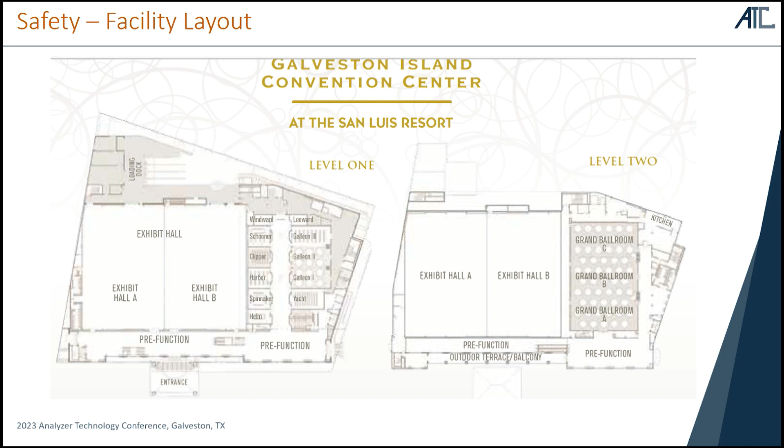A little bit about the new look, the little bit new format for the place. We've changed the dates. Thankfully, everybody got it correct. I did meet an old friend yesterday who thought it was Sunday, which is wonderful. We used to be Sunday to Thursday and drag everybody in on a Saturday or a Sunday. We decided that was not valid anymore or necessary.

So this is our format, Monday to Friday, and we will do this going forward. Monday is our technical training day. For those that were there yesterday, we had a fantastic turnout. We had about 120 students yesterday come through the halls, techs and so on, come through both of our tracks. We do a fundamentals course, which runs through the basic understandings of all analytical instrumentation in a program throughout the day. And we do an advanced course this year, focused on sample handling systems. We do a common one on that.

We've expanded our show back now to... We can't hear you. You can't hear me?

Can you hear me now, Rocky? It's my English accent—what we do is mumble, then hand you a flag, and you're in the British Empire, buddy. That's how it works. Suddenly we own you, and you didn't realize it at all. That's the rules, we've been doing it for years. We're quite good at it, apparently. How about that, Rocky? You hear me okay now?

Yeah, all right. So today, Tuesday, Wednesday, Thursday will be our event, starting today, all day tomorrow. Papers in this hall. The rest of the event will be down in the vendors hall, including everything except breakfast, which will be up here. All the drinks, all the sponsors and so on will be downstairs. Technical papers in here. The vendors hall is expanded.

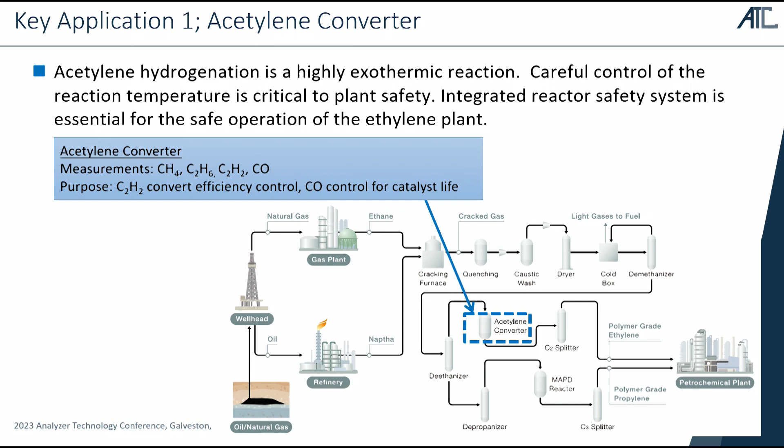Our target measurement components are methane, ethane, acetylene, and CO. This is our target specification for these four components, at the acetylene converter inlet and outlet. The outlet requires very low sensitivity, low concentration measurement, around 10 ppm or less. Our target specification for performance is 1% of full scale for linearity and repeatability, a response time of 3 seconds for Td plus T90, and a calibration interval of 1 month.

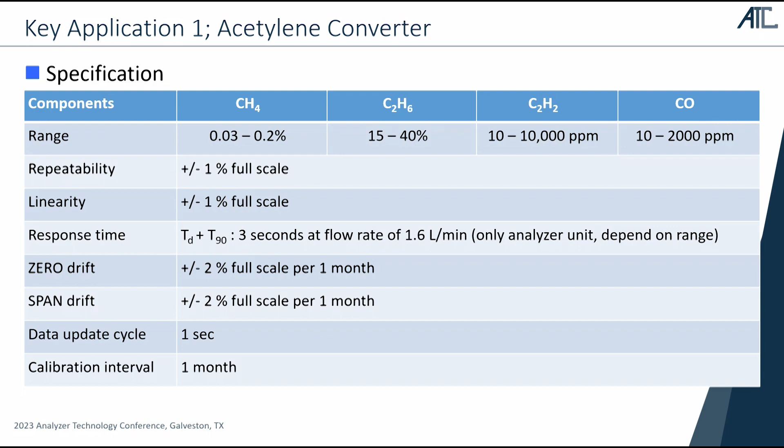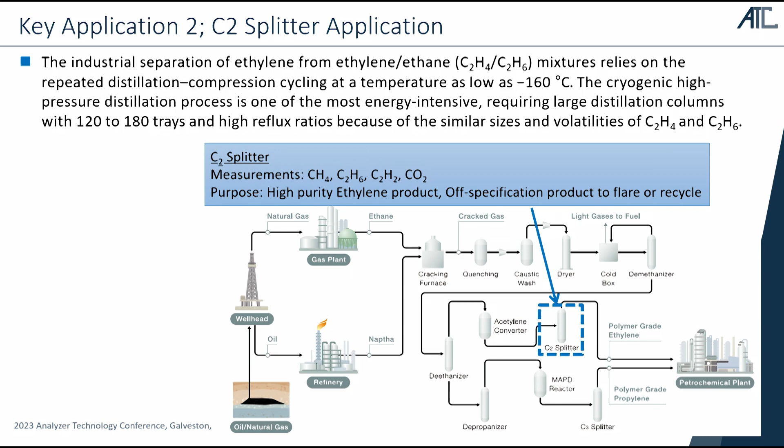And the second key application is a C2 splitter. This is also important for the ethylene plant. The separation of ethylene from ethane by distillation is normally the final step in production of ethylene, so impurity control is important here. This is also a target specification for the C2 splitter, so the performance specification is the same as the acetylene converter. That is our target.

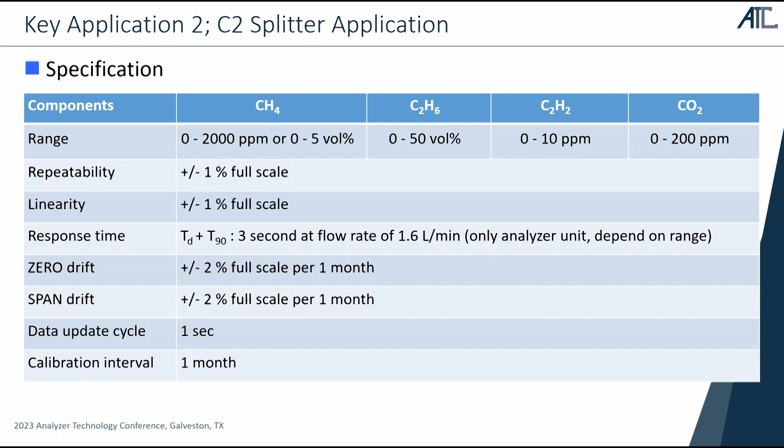This analyzer has many advantages in gas sensing: a high resolution mid-infrared laser system, 3 second analysis time, high sensitivity down to minimum 20 ppb, and it equips up to 6 lasers per application depending on customer requirements. It's robust, simple, and compact. I'll later explain the high sensitivity achieved by our unique interference correction method. That is one key component, a keyword.

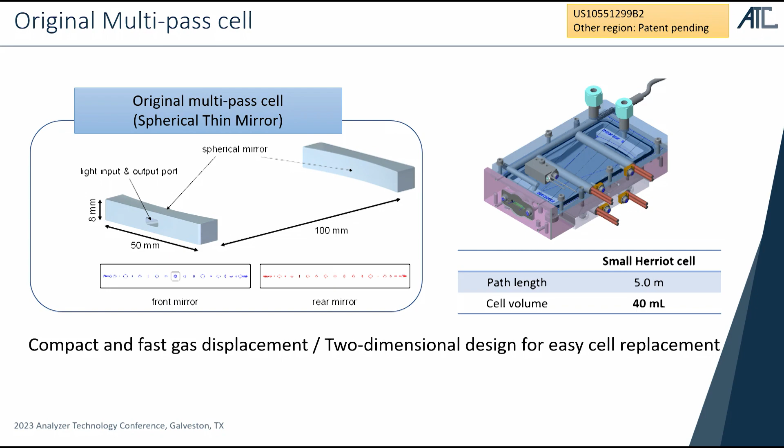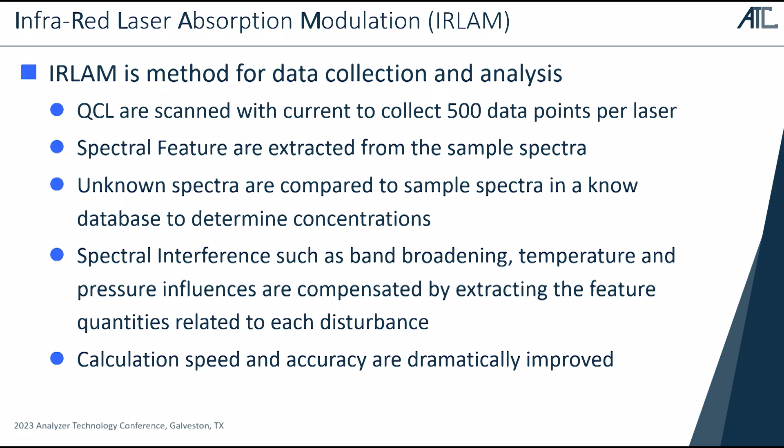From the next slide I want to explain our new technology, IRLAM, infrared laser absorption modulation. It's a new technology. IRLAM is a method for data collection and analysis. The QCL is scanned with current to collect 500 data points per laser, and spectral features are extracted from the sample spectra. Unknown spectra are compared to sample spectra in a database to determine concentration. Spectral interference, such as band broadening and temperature and pressure influence, are compensated for by extracting the feature quantity related to each disturbance. Calculation speed and accuracy are drastically improved.

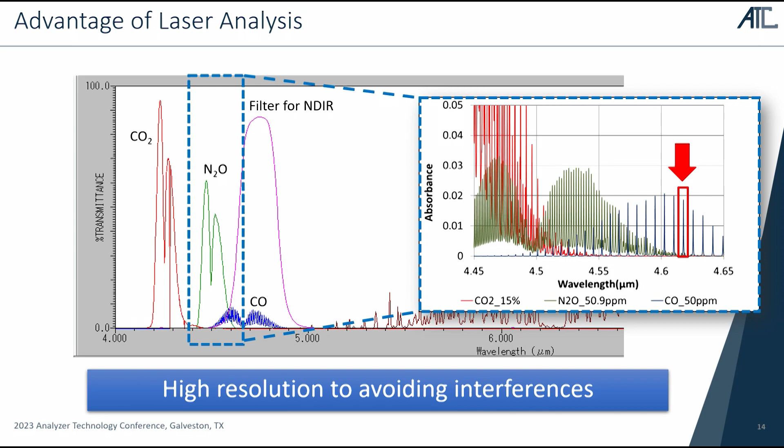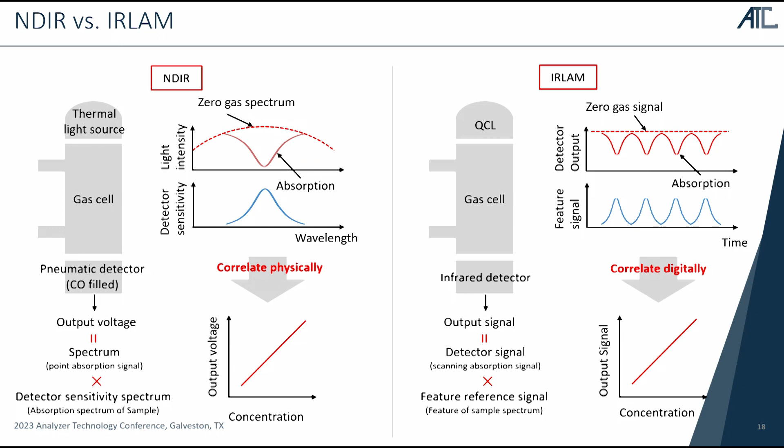This slide shows our calculation method of the feature quantity. The feature quantity can be obtained by the sum of the product of the absorption signal and the feature reference signal. If the shapes are similar, the feature value becomes larger. If the shapes are not similar, the feature value becomes smaller.

Since this feature quantity is proportional to the concentration, it can be quantified by assigning the value based on the concentration at the time the feature quantity is acquired.

In the feature reference method, the center line—red, blue, green, and yellow—is a feature reference signal prepared according to the absorption shape to represent the characteristic of the waveforms. It's possible to represent a waveform with a large amount of data using only 12 data points, without losing necessary information.

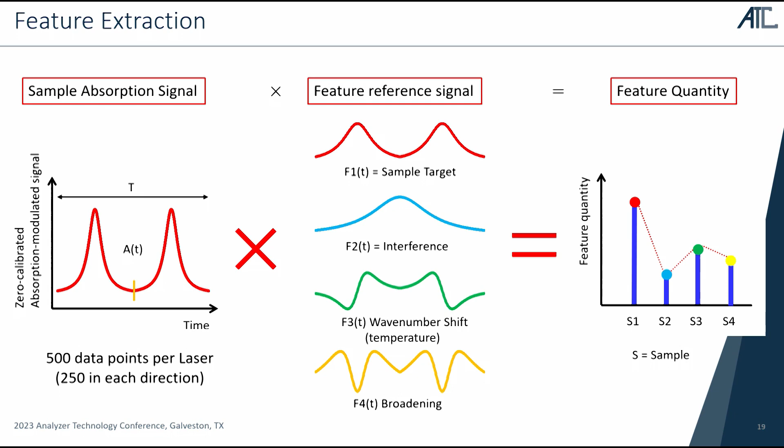This is an example of how to create the database. As explained, we prepared almost 12 different data sets. The red one is our target signal. The blue one is the interference signal—here showing just one component interference, but we can set 3 or 4 components of interference.

The green one is a wave number shift; it's a temperature effect. The yellow one is broadening, which comes from pressure.

So how do we create our database? We set this red one as the target gas, for example ethylene at 10 ppm. Then other parameters are changed—this means the broadening, the yellow one, changes.

Then the wave number shift is changed as well. This right graph shows the interference database. We set the interference like S1, then we change the temperature and pressure as well. In advance, we created this database, then installed it on the customer side. That is our database creation process.

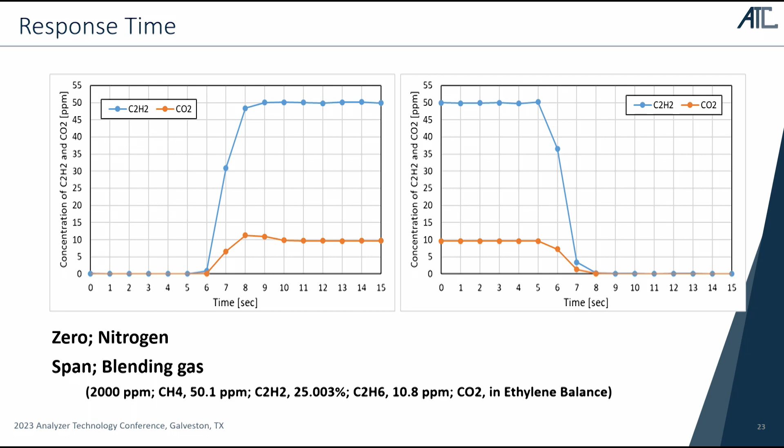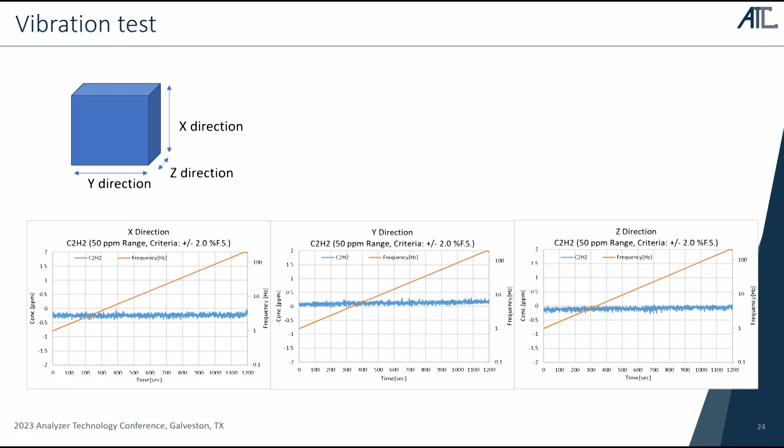In the next slide, I show the field trial results. We installed it at an ethylene plant and tested for almost 6 to 7 months in the field. This is one upset condition data.

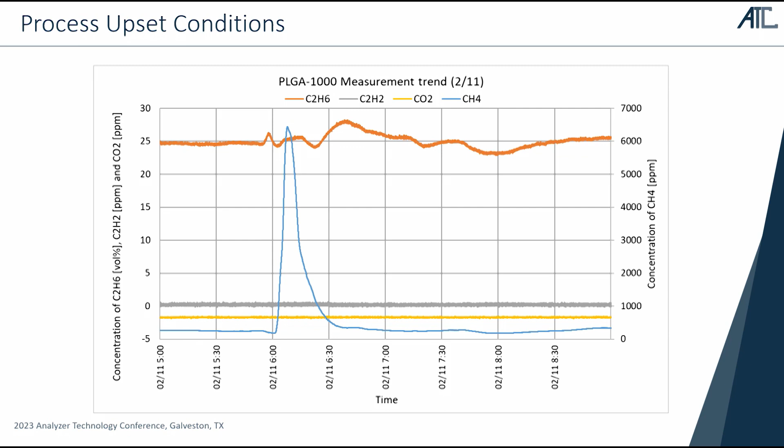The gray one is acetylene, yellow is CO2, blue is methane, and orange is ethane. Around 6 a.m., suddenly methane spikes—it's an upset condition, but acetylene (gray) and CO2 are stable, meaning no interference effect for acetylene and CO2. The orange one, after spiking, moves a little, meaning the gas condition has changed, but ethane catches this trend. This is a good result in the field test.

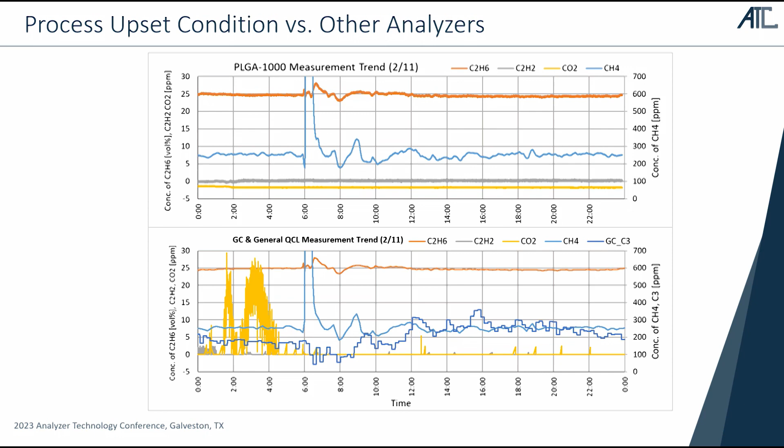Also, the same data above is from the previous page. The bottom one compares a general QCL analyzer—the same yellow CO2 line is moving there, which I think means an interference effect in the general analyzer. But our analyzer stays stable, which is a good result as well.

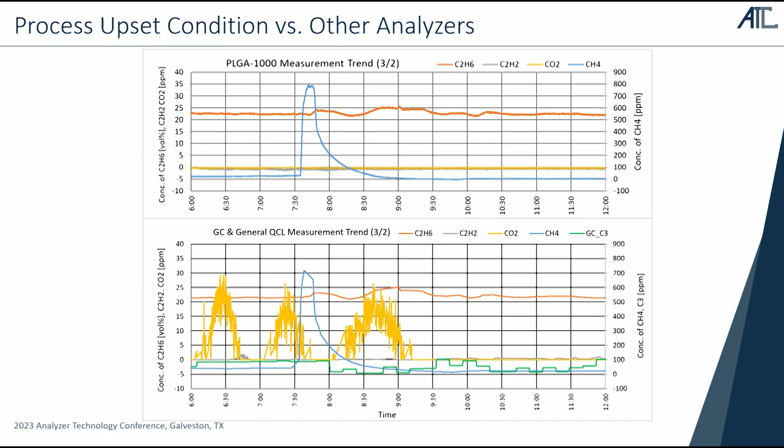Okay, that is my conclusion. We developed a new gas analyzer and a new technology, so achieved high sensitivity and fast response, then obtained good test results in our laboratory. Field test trials in the ethylene plant also gave good results. Acetylene and carbon dioxide were stable in the upset condition, catching up on quick impurity. Next, our target is expanding more components and applications, ethylene feed or caustic tower, and trying to enter the carbon neutral market. All right, that's all for my presentation. Thank you so much.

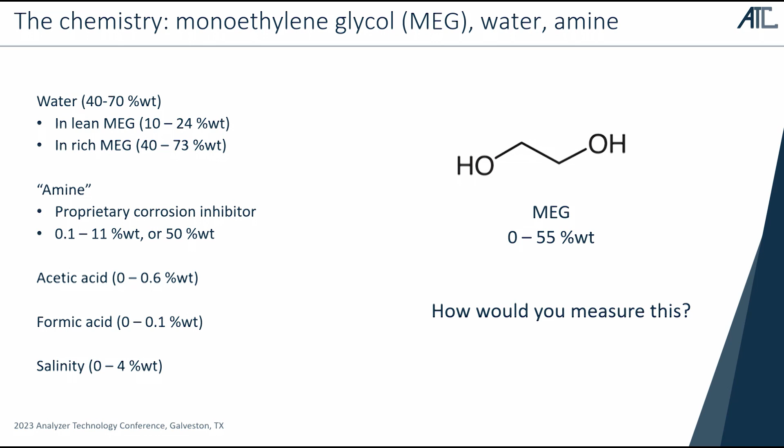The amine is present here as a corrosion inhibitor, and the things it prevents corrosion from are acetic acid, formic acid, and salinity here, so chlorides that have been floating around that we need to assess to see whether or not they can be taken out.

So how would you measure this process? There are a number of different techniques, and we've seen many great examples of some of them that have been available today.

One of the most obvious ones is using things like GC, where you go in, grab a sample, process it, and use a column to separate out all the different chemicals and analyze how much there is. The advantage is you get to see all of the species nicely laid out, but it can take time—it's not a fast process, so that can be difficult. There are also safety implications for having to perform grab sampling; it can be quite difficult to do.

There are also techniques you can do simply online, seeing things like pH, temperature, oxygen levels, various different sensors from which you can infer other things going on, typically measuring just one thing. You can use that to work out what's going on, but the information coming out of it is something you'd have to use in conjunction with your chemical knowledge to find out what's actually going on inside your process.

In the middle here we have spectroscopic measures. There's a full raft of things we can use here, which have the advantage that they're right in your system, monitoring in real time, and you're able to work out precisely what's going on inside because it's able to see all of the different chemical species all at once, so you can analyze those.

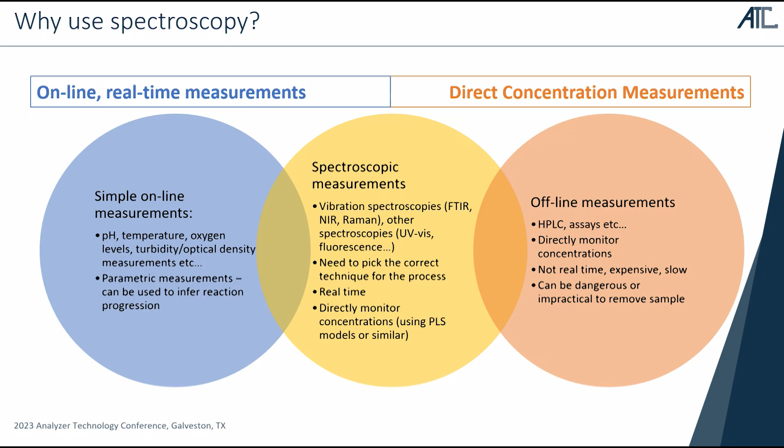I'm here to talk about a potential application in mid-infrared, which has been an unusual one for something like this. Often people will go to something like near-infrared for an application like this.

The way you'd have that is you've got an emitter down here, and then you've got a flow cell or some kind of sample cell where you're able to pass light through. You shine infrared light back, it comes back, bounces off a mirror, and the absorbance is used to work out what's going on there. That builds up your spectrum.

That's the ideal situation. The reality is often made more complicated, as we saw for those of us who were in the sampling lectures yesterday. There's presence of bubbles, there are particulates, and those can cause scattering effects which can be problematic for an analysis. So one way you might consider going about this is using mid-infrared.

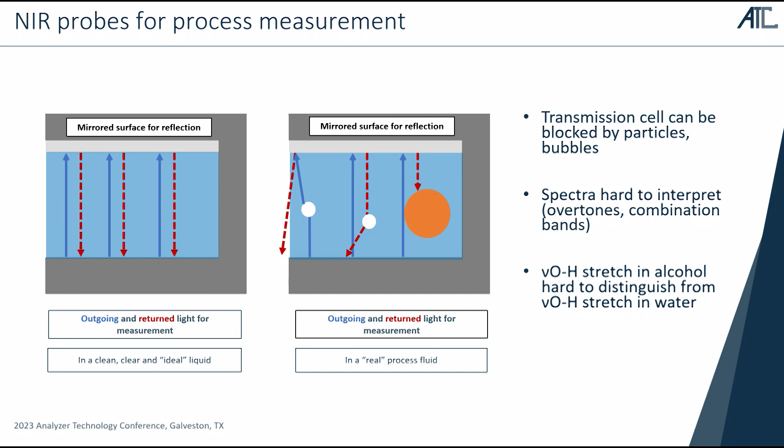That's this stuff here, and you're using something like an ATR probe. So rather than using a transmission cell, we have a sliver of diamond down the bottom here. The infrared light comes out the bottom, interacts only with the very tip of this—the penetrative depth is measured in microns, which means most of this stuff floating around is not of any concern to us. We only see the stuff that is in intimate contact with the diamond probe here.

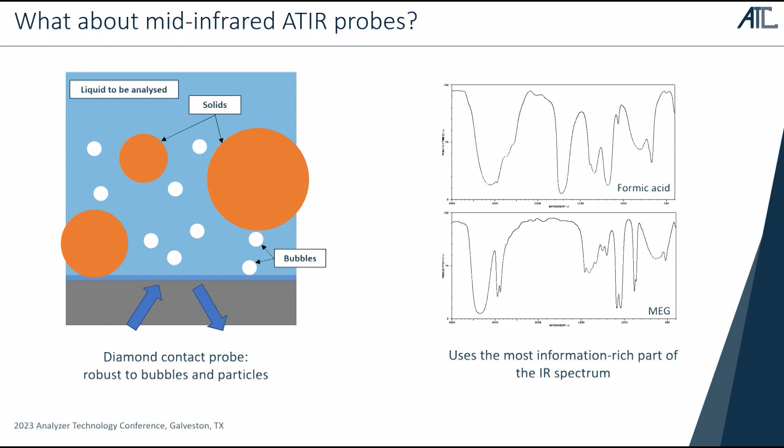It comes back here, and using mid-infrared allows us to use the most information-rich part of the infrared spectrum. We've got lots and lots of peaks here, which you can use to pull out what's going on inside the process.

There is a problem with mid-infrared, and that has to do with robustness. How do you get the device where it needs to be? What are the problems you face with that?

What we have here is a standard Michelson interferometer, and you can see the way it works. The light comes in through here, you've got a semi-silvered mirror—some of it goes up, bounces back through into your detector, and some of it passes through and interacts with a moving mirror. That mirror is moving very rapidly backwards and forwards, and that gives you the interference patterns you need to deconvolute into a spectrum.

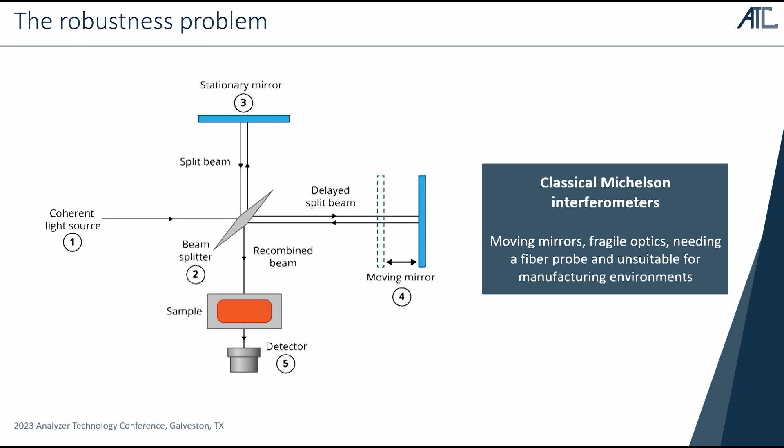The problem with this is what happens when you take something that is designed to vibrate and put it next to something else that's vibrating. If you take most Michelson interferometers and put them next to a pipe in a chemical facility, the vibrations would cause the spectra to be a complete mess.

It shakes it around and causes interference patterns that you're not able to deal with. One way you could get around this, and you see this in near-infrared things, is by taking the spectrometer and moving it far away. So you have this out of the way where it's going to be vibrating, and you have a fiber optic cable that links the two.

The trouble with using this for mid-infrared is that the materials you use to make fiber optic cables attenuate infrared light very seriously. So as the light comes out here, it's all well and good, but as it comes back, you end up with not very much light coming back in to do your analysis. So we've got a problem here. How do you deal with this? How do you square that circle?

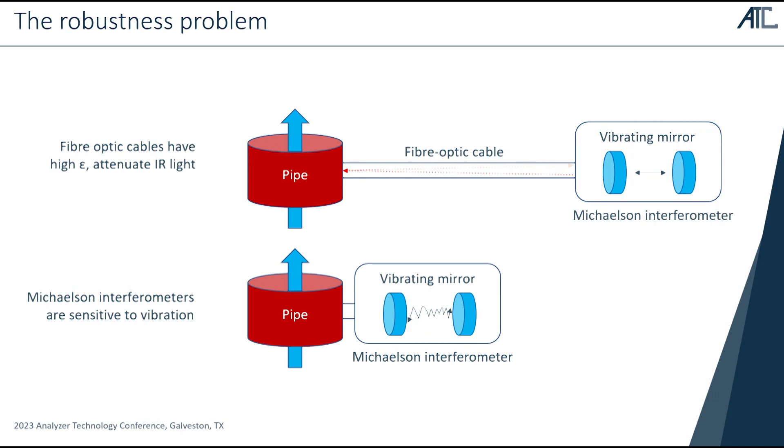The way we've gone about it is by dispensing with moving mirrors. We'll come back to that in just a moment. This is our piece of kit, which you can see down there. Please do swing past the booth if you haven't done so already.

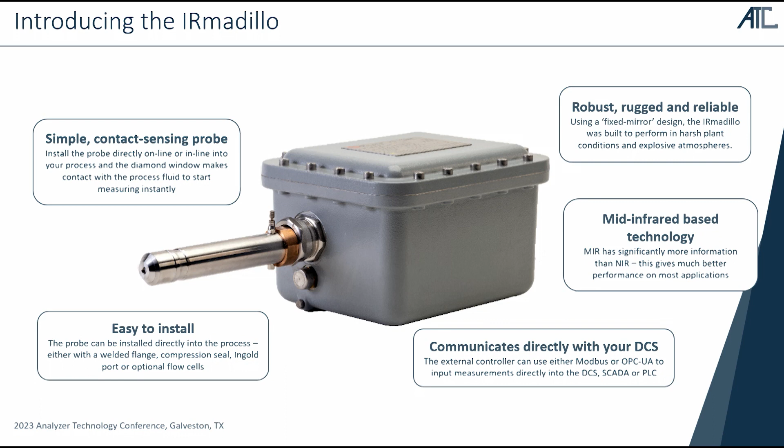Here in all its squat utilitarian glory is the IRmadillo. It's a small box, about this big, with the probe extending to about this big. It goes directly into your pipe, and it's in a rugged aluminium box which can take a real beating. The reason it can take a beating is because of its optics.

So we do not use a Michelson interferometer. We use something with a proprietary series of mirrors, curved surfaces, which I'll take you through. Basically, the probe is a hollow tube. There are no fiber optics here. It is completely empty. We've fitted it with industrial purge gas to remove water vapor.

The light is emitted by an emitter here. It goes down here, makes a single bounce, as we showed in that diagram, where it interacts with the material that's in your probe. So this is directly in your process, and it's in intimate contact with the process fluid.

It bounces back here. Again, it passes through a semi-silvered mirror, but instead of using a vibrating mirror, it uses a series of curved mirrors which generate a two-dimensional interference pattern up here. At which point this computer, entirely contained within the device, performs immensely complicated maths, which I have absolutely no idea about, but the output of it, we put in a series of chemometric models, which then spits out the chemical concentrations of interest.

It has no moving parts, and so can be taken pretty much anywhere.

Ooh, I wonder if I'm going to be able to play this video. Pity if not. No, we're not. Okay, well, it's immensely impressive.

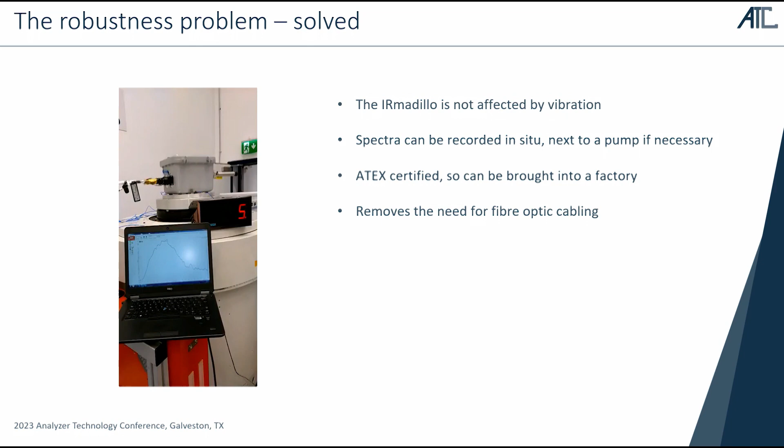Good. Beautiful. Okay, that's great. Thank you.

Thank you very much. So what that means is you can now take this instrument into places where you can't take other instruments. Here we have it in a series of industrial applications. We've got it plugged directly into the pipes in the middle of the factory process, with no need to lay expensive fiber optic cables to carry the information around.

What we have here is quite an old picture now, where we had a conditioner system which would allow us to take the samples down to a temperature. This was only a formality as far as we're concerned. The instrument had not been formally certified as being tolerant to, I can't remember what it's up to now, 220 degrees Celsius.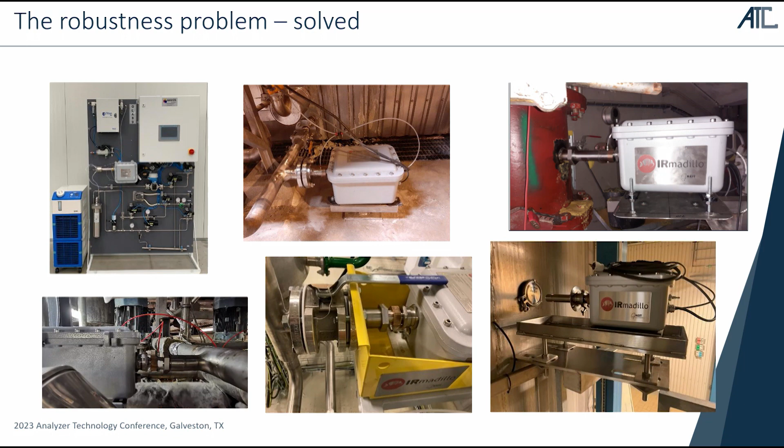We required a conditioner just for legal reasons, but in fact it's completely robust to those kinds of temperatures, pressures, whatever—it can be taken anywhere. As you can see here, some of these are ethanol applications. We have a cradle to take it in and out, which means you can deal with all the problems that come from ordinary setups.

So how do we build our chemometric models that allow you to take a spectrometer and turn it into an analyzer? What we do is plug it into your pipe, and it records spectra once every 2 minutes. At the same time, you'll be using your standard process control techniques, for example an HPLC, and we take the results that come out of this and marry them up with time-stamped spectra from the machine.

We use that to build a chemometric model that associates the concentrations coming out of the HPLC with the spectra coming out of the instrument. What we end up with is a chemometric model which produces this nice straight line of measured concentration against predicted concentration. Once we've got that, we upload it to your system, and that's it.

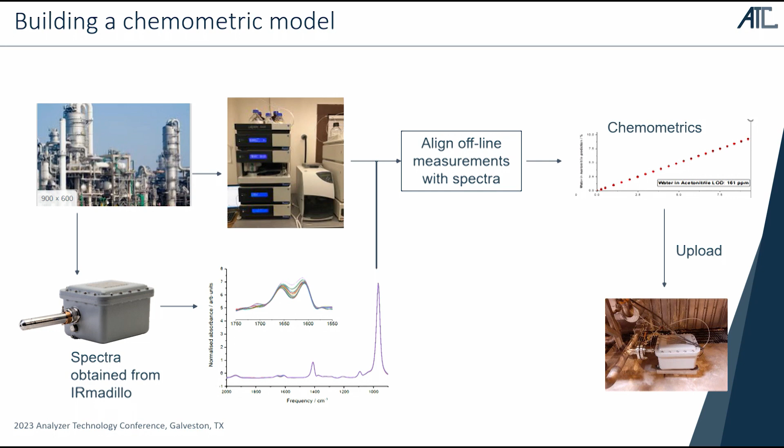Where does the data for this kind of thing come from? How do we make these models? They can come from three sources, and usually we do a combination of the three. The best, overwhelmingly, is online process data, where we actually look at the spectra coming out of, for example, the recovery boiler in our application. You put it in there.

If there are similar applications, or if we have data from other installations in similar facilities, we can combine that data with other applications and put them all together to make a general model that suits many different instruments.

More relevant to what we're talking about here is the proof of concept stuff, where you've got a little sample cell that sits on the front. We make up artificial samples for proof of concept lab tests. The idea is you make this to give you the range of concentrations, then fill it in with online process data, and if you need more, add data from other installs. This is what allows you to build the model, as you can see here.

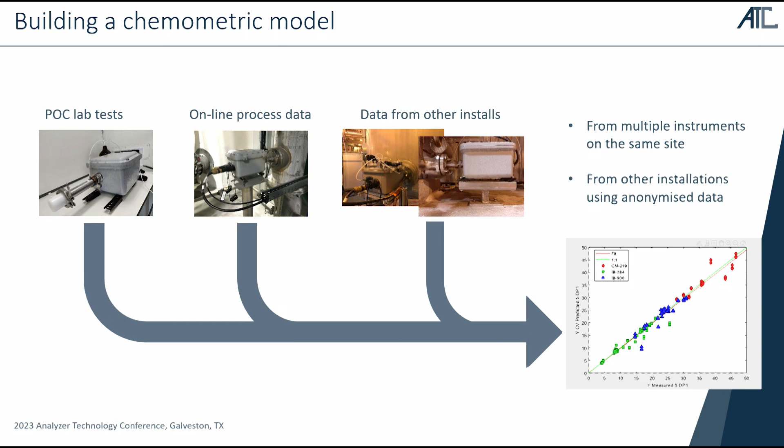Our client wanted us to build a proof of concept that they could demonstrate, and rather unusually, they wanted to do the analysis themselves—normally we do it in-house. So in tandem with them, we developed a set of mock-up samples in which they provided us with their proprietary amine, and we provided all the rest. We put these things in here.

We developed with them a list of concentrations that would broadly represent the lean monoethylene glycol and the rich monoethylene glycol, which has a much higher water concentration. We put those in, obtained the spectra, and they reported those spectra back to us, and we went about building some chemometric models.

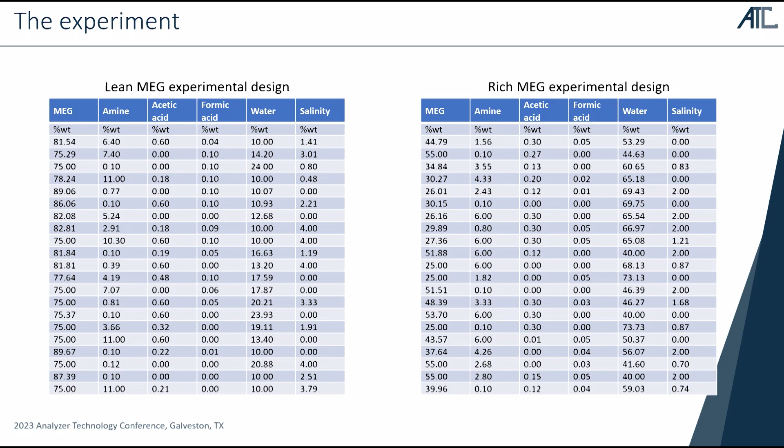So what we tend to do is go straight to partial least squares as our first line of attack. We look to see which spectral features relate to changes in the concentration of the things of interest.

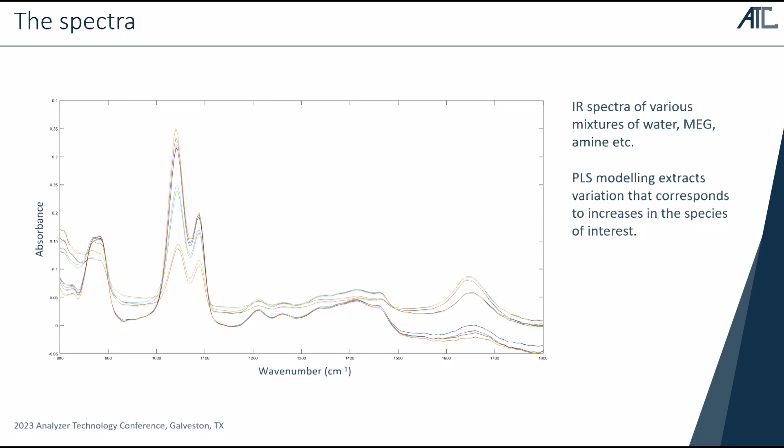So the output of partial least squares - I'm speaking to many chemometrics people in the audience - but basically the output is a series of loadings. These are mathematical constructions that show orthogonal variation in the different species being analyzed.

This loading contributes 94% of the variation that comes from water, so you know this thing is going to be very important going forward. This one rather less so, and that's good. So we do this for all of the different species and see how well they do.

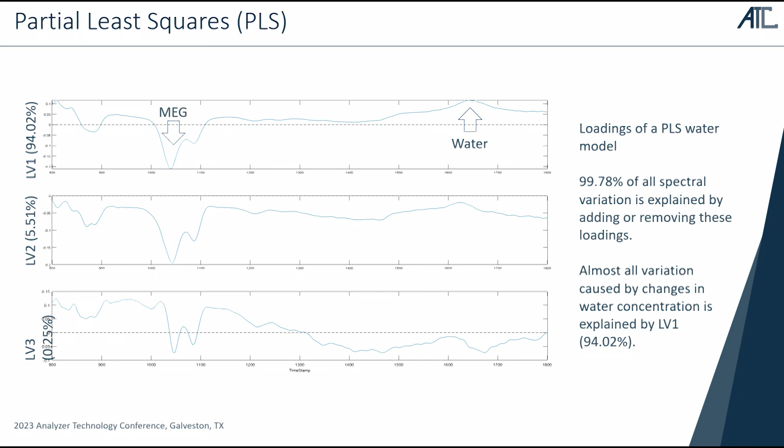What we do for this is apply the first derivative. That helps to take out variations in the baseline and possible temperature effects. It doesn't take them out completely, but it takes them out to the point where you can neglect them.

We validate these things using cross-validation. What we do is use a Venetian blinds method where you take out some data points, build a model on the points that remain, then predict the points that were taken out, and repeat that many, many times, taking the average so we can see how much variation there is. It's a check for the robustness that we can do.

You want the RMSE-CV to be as low as possible - that's root mean squared error of cross-validation. And these things are all nice and low, demonstrating that we're getting good models coming out of this.

For that, we moved on to our standard next line of attack, which is support vector regression. If I talk about support vector regression, how many people know what I'm talking about? Nod your heads, look blank. Okay, good - oh, I'm in trouble now.

But the simple solution is just say, well, I'll just throw it over here. I'll cut a huge chunk out of the middle and send that back for reprocessing. But when you do that, you take what is a lot of good product and send it back for reprocessing, and you've just wasted money, both in shipping, product you didn't sell, so on and so forth.

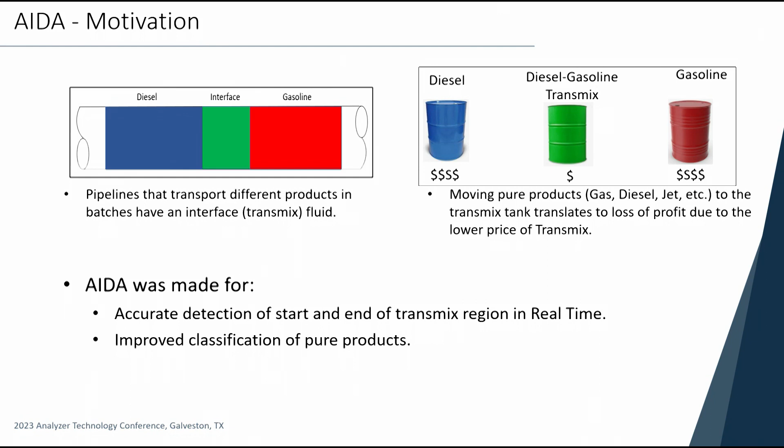So our goal is to use tools to automate a solution so that you can cut this valve switch as close as possible to the end of pure product. So you put his absolute highest amount of pure product into the pure product tank, and you put as little as possible transmix into the transmix tank, which has to get shipped back. So that's the general problem.

Now, I work for JP3 Measurement. We sell near-infrared analyzers. So our solution, of course, is going to deal with near-infrared spectroscopy. But all the methodology I'm about to tell you will work for any optical spectroscopy. And you could use this thing that we made and plug it into a UV vis or a mid-IR. Heck, you could even use a GC chromatogram, and it would all work.

Now, in most cases, if you're doing this, you'll want to focus on speed, because in some cases, minutes relate to huge amounts of dollars, and I'll get to that as we get later on. So the key feature is you need a measurement tool that can tell the difference between all your different products.

I can do that. A gas chromatogram would have a different layout because of that same difference. UV-vis probably would work. Choose your optical spectroscopy, it would probably work. And usually we recommend optical for this kind of thing because it's faster and more robust.

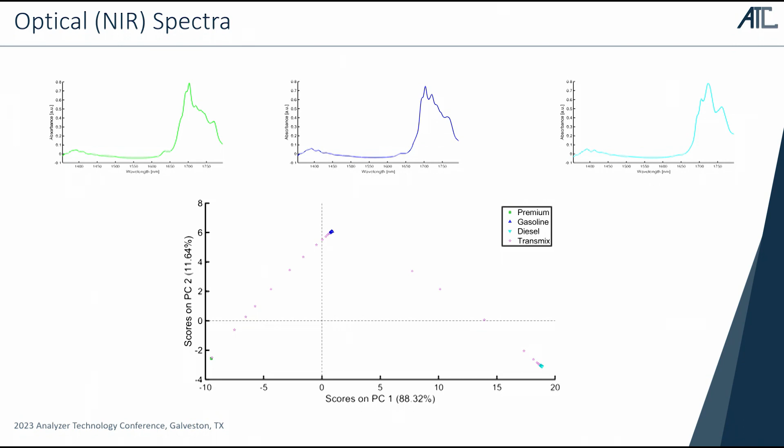And the way this works is you've got your new spectrum comes in. So I've got all my previous spectra. Let's say this is all pure product 1, we'll say it's diesel. Every time I get it's still diesel in the pipeline, I'll do that operation, and it'll plot on top of the rest of the diesel because it's the same spectrum.

Eventually, when I get to that transportation mix, when it starts flowing through the point where my sample point is, it'll start plotting farther away because, hey, it's different. I get a new spectrum, I draw a circle around it, and I set some distance that says once this new spectrum, more than some percentage of the points are not in the circle, hey, we've changed.

Now you need to actuate the valve, either automated or somebody will say, hey, look, the thing on the Modbus control says 1, I need to push the button to change the valve. And then I keep monitoring it, and I do that every scan.

Some other ways to look at it. I'm going to go over here this time. Keep everybody thinking, mixing it up.

So I get my spectrum. This is a diesel spectrum. I plot it, there it is. It plots on top of all the other spectra, all the previous spectra. They're all within the circle. I say, hey, look, it's a pure product.

And then I take that spectrum, I put it in some sort of classification model. This one here, I'm using the k-nearest neighbors on PCA decomposition. And I say, hey, look, it plots here in the diesel cluster. Output that it's diesel. And you can put on the screen that, hey, it's diesel.

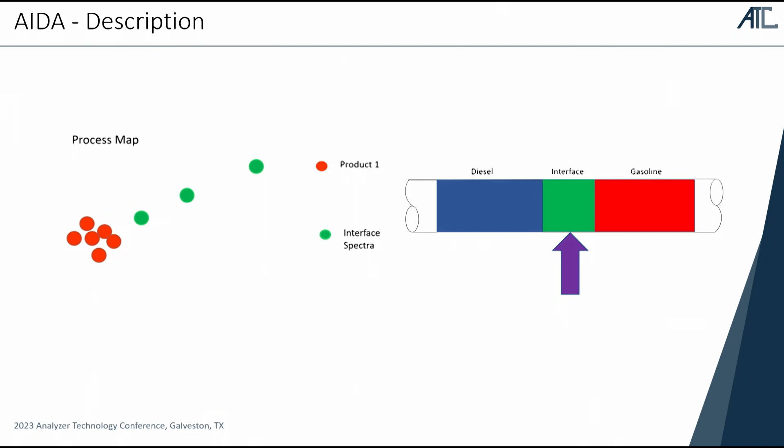I'm in the middle of the transportation mix. I can see that the points are still plotting. They're moving along, they're no longer in the cluster. Not good product. Eventually, I get into good product, and after the concentration of points in whatever parameter I set is, I say, hey, it's diesel. Shut the valve over to the diesel tank, and let's go.

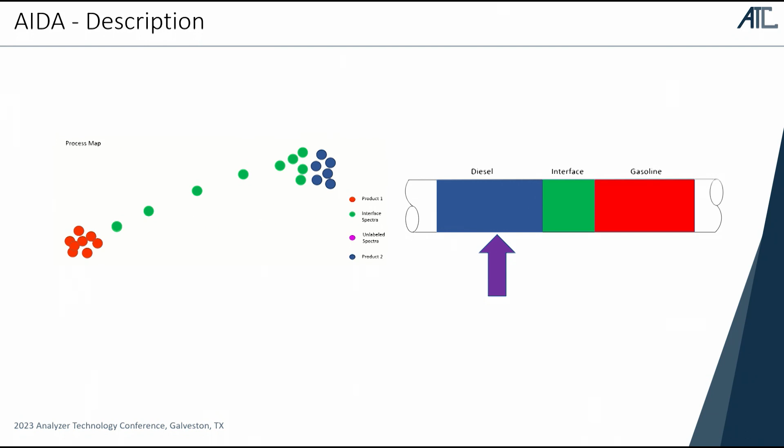In automated, this is what it'll look like. There's my new spectrum. There's a circle. Got past the coverage in the circle. Say, hey, interface. Next one comes in. Still no other points in the circle. Keep doing it until I start clustering again. There you go. Diesel.

Make sense to everybody? You can feel free to interrupt me whenever you want. I kind of like it that way better.

But so I gave pretty much the same presentation. I give this to anybody who wants to use this kind of algorithm. And what we're going to do now is look at a couple real-world cases of real field data and kind of how this works.

So the real key is that circle size, because you would think everybody's got the same thing, but it turns out that every customer has a different secret sauce they want to use for how they do this. Some people, their tolerance, because you have a big storage tank, you can accidentally ship a little bit of diesel into your gasoline and get away with it. And depending on pricing, maybe they want to do that a little bit, or a little bit of transportation mix can get in the gasoline to some tolerance that doesn't foul the tank.

The diesel tank has very little tolerance for gasoline, but you still want to be as close as possible as you can without failing your physical property test, so that when somebody comes and draws a sample from the diesel tank and runs a flashpoint analysis - which is, if you're familiar with diesel, take a little cup, put some diesel in it, heat it up until it lights on fire. Flashpoint, the temperature where it lights on fire, is diesel. That's flashpoint of diesel. Usually it's 140 degrees Fahrenheit, something like that.

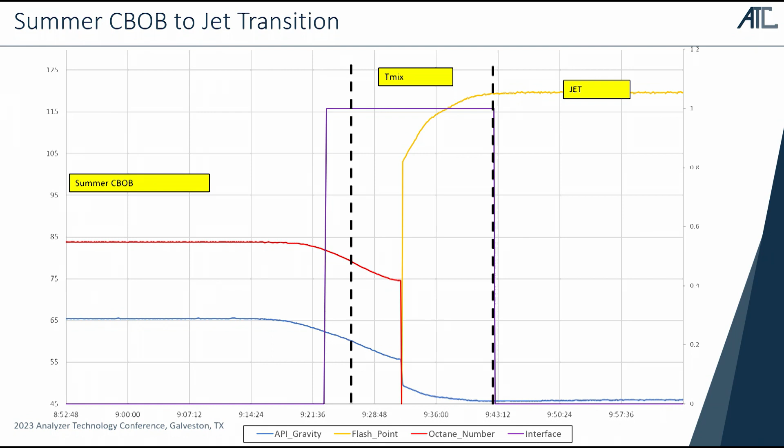Nobody will ever complain that you're giving them 93 octane gasoline at 87 octane prices—they're happy to do that. But on the flip side, you as the operator want to put as much of the regular gasoline into the premium tank as you can possibly get away with without putting your octane number below the threshold, because every barrel of regular you slip into the premium tank, you made whatever the delta is in price.

This is the whole oil and gas industry, as far as I can tell—sticking butane into places so you can sell it at gasoline prices, sticking ethane into propane so you can sell it at propane prices. There's all this kind of slipping the low quality product as much as you humanly can within the rules to get as much money as possible.

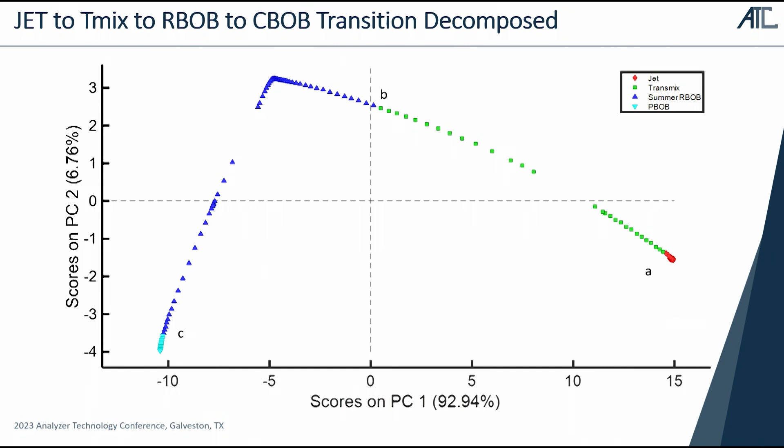Ideally, we're going to make a whole lookup table of all the possible transitions with the parameters that you need, load that into the computer control system, and then you say, we're getting ready to go to jet from gasoline, the parameter is going to be this. Let the system go. And that's it. What are your questions?

I adhere to the keep it simple, stupid principle. Simple is always better than complicated, which is what our goal is with this. Any other questions?

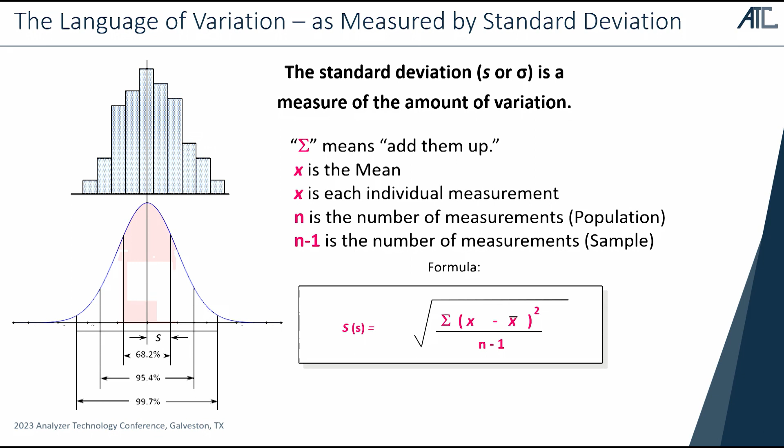I think our biggest information comes from just basic statistics, our standard deviation formulas and things like that. And that's kind of really significant to know that it happens. But we don't really want our resources out there calculating that stuff - it just needs to be collected so they can evaluate the patterns. The pattern recognition of data is very, very significant.

In fact, when we look at this kind of thing, and we look at what we call as can be good or what is possible, this type of spread of data applies to pretty much every analyzer we throw out there, and it applies in ways that we may not think about it. We look at things like CP values - how many of us really know what a CP is in statistics? What does CP mean? Raise your hand.

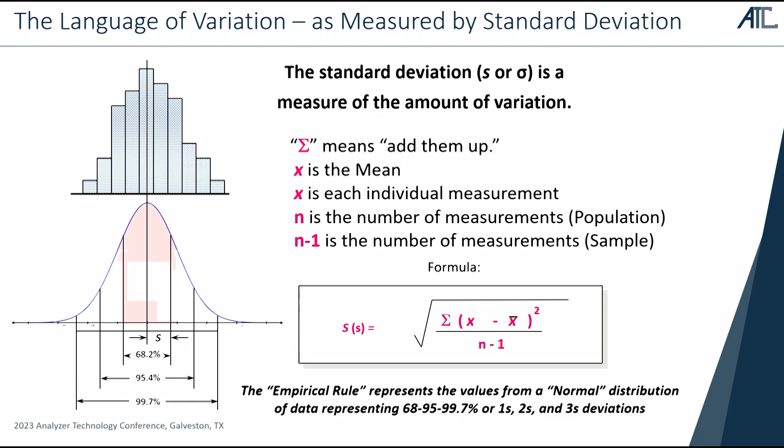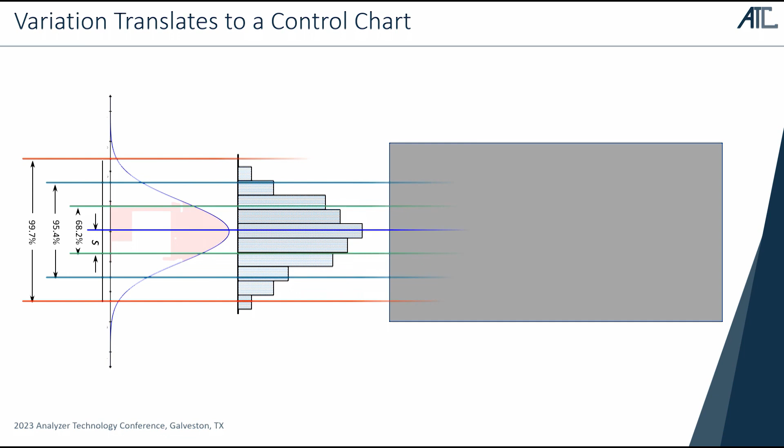You see this little chart right here? Let's see if I can get this thing to work for me - no, of course it's not. That little hump of data, that histogram, and then that represented chart - if we were going to put those two red lines together, the distribution of data between those two red lines and the ratio to what the chart is, it becomes what your CP is. It is a ratio of the width of your data to the width of your spec limits, basically. That's all it is. And a CP of 1 means your data is a perfect fit - it means that from red line to red line, 100% of your stuff comes in, and that's fantastically well.

But as we look at that, this is an overall great statistic. But one that we move a little bit further down into is something called CPK. CPK is the value that you really want to achieve. And statistically, a value of, I think, 1.33257, but who keeps up with the detail? 1.3 is basically what we call, we're in control. That's the perfect - we don't need to be any better than that.

When you do this ratio of CP versus CPK, the difference is this: if this hump of data would slide up above these lines, your CPK value is going to drop like a rock, okay? Because what it's telling you is that your data is not centered between your two specification limits. You may have a good spread of data, but it's not centered on where it needs to be centered, okay? As you get better information, let's say that little hump gets really thin, narrow, and tall, but it stays centered - what happens to CPK? It climbs like crazy, huge number.

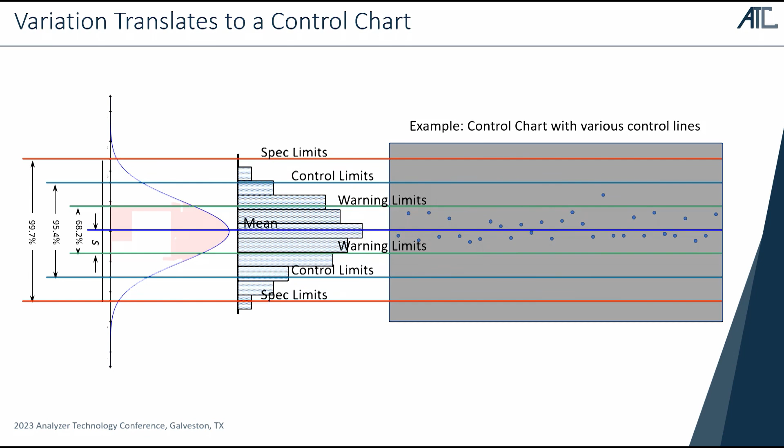It's possible to perform a measurement with technology that's really not proper for that. It's going to show up on a CPK, because a CPK takes everything into consideration - the spread of data, how well centered it is, the shape of the curve. It's huge. When we say 1.3, we're saying you get a 1.3, you're great. Anything below 1.3, you need to look at something - something's not going right. If you get greater than 1.3, and way greater, it might mean you're putting too much maintenance into that system to keep it there.

So as we look at these things, what we're going to talk about - just to show you some examples - is what is 'in control and capable.' When we talk about being in control and capable, we're really talking about a trend of data that sits between specification limits and has a CPK of 1.3 or greater.

And this isn't your process measurement - this is you challenging that technology with something you know the value of, and doing the ratio of how well you're recovering that. So if I've got material A that has 100 ppm and I measure it and get 97, 98, 102, 103, bouncing back and forth like that, that's a pretty good number. But if I've got something at 100 ppm and it reads 85, 115, you've got a problem. Your CP is going to be bad, your CPK is going to be bad, and that becomes an issue.

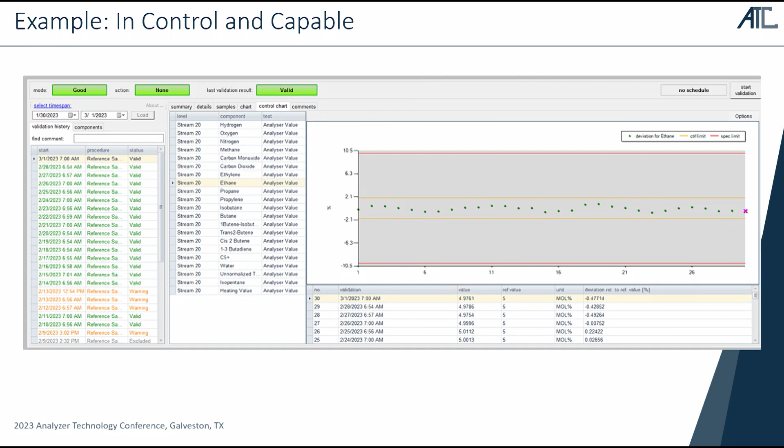So this is going to be some real world data we'll come across in a minute, and I'll share that with you - but we're going to talk about control versus capability. As we look at this information, the histograms and curves you get, the reality is you have special causes that can slide these groups of data apart.

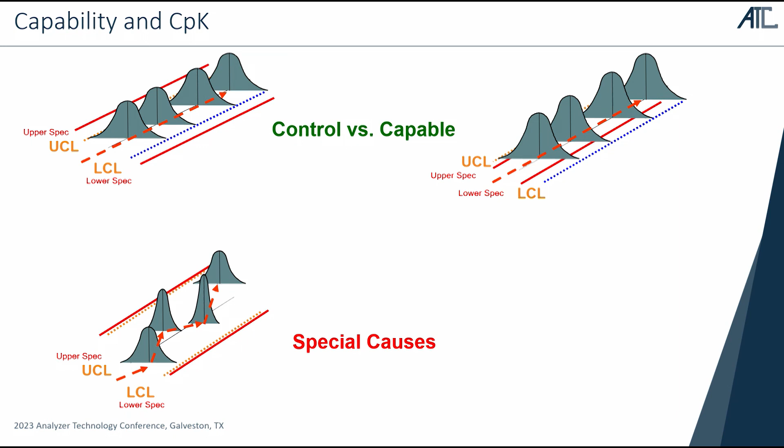Now what do those little hills represent? These represent points in time where we ran a series of validations - that series is represented in one of those little hill shapes. As we look at that, you can see they're shaped differently: some are narrow, some are taller, some are wide, some miss the center line, some go above the control limit, outside the control limit. All of these patterns show different things you can see in a control chart. They all basically mean we've got a problem, okay?

Now, as we start looking at that, what we're really looking for is what happens and what kind of CPK these representations would show. I've given you some examples here, okay? The only one that looks fairly decent is that one in the top left-hand corner, and it's really not all that good. The rest of them, where they look like they could be here, are all problems. And the reality is you need to look at that from a maintenance perspective - in terms of something that's chronic, not something that's acute.

These things don't happen because you got a filter plugged, or because something broke. These things happen simply because their spread data over a long period of time is now indicating the CPK value of something less than 1.3. And that's something that you can kind of grapple with.

As we look at these things, you can kind of look at those—hard to see, might be up there—but you can basically see where, if you have a system in control, your control limits can be narrowed down quite well. And if you narrow them down and you get a problem that pops up later, you've had something that changed.

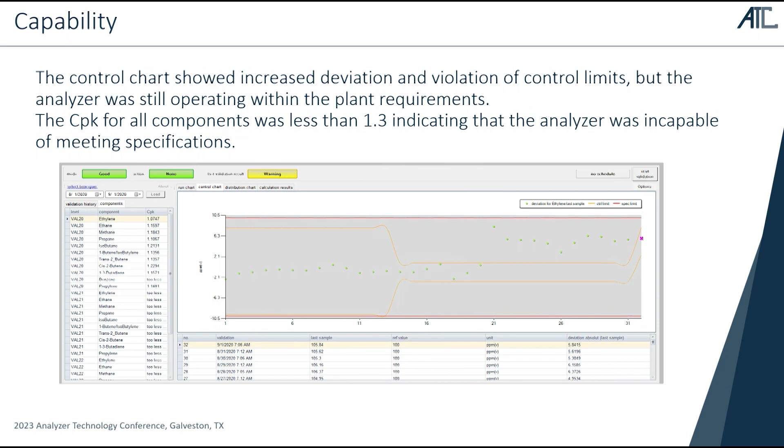This is real world, by the way. This information has been whitewashed, and it was provided by one of the chemical plants. So everything we're going to show you in this is actual real world examples.

So when we talk about performance or looking at data, it really falls into two categories. One is performance monitoring, one is diagnostics monitoring.

What is performance monitoring? Performance monitoring is basically your validation frequency, whatever that might be. You look at this kind of thing and it represents past performance. It has nothing to do with what's going on right now.

Diagnostics monitoring can be continuous or discontinuous. Continuous is on a regular, ongoing basis. Discontinuous is maybe not on a regular basis, but it's ongoing, so I don't know that there's really a difference there. But this is something you would do—trend like the technology. I'm looking at things like a bias voltage, I'm looking at transmittance, things that reflect the technology you selected for that measurement.

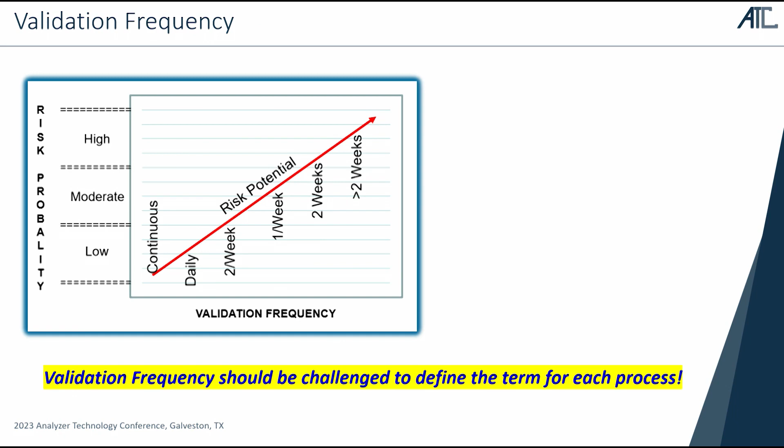The last thing, I guess, really is what is the validation frequency that you really want to have? This is something that's a site-specific issue. You're going to have someone at your site that's going to be responsible for this—let them pick that. They know the technology, they know what they can do. This really needs to happen at the site level, done by people experienced with the technology and the process.

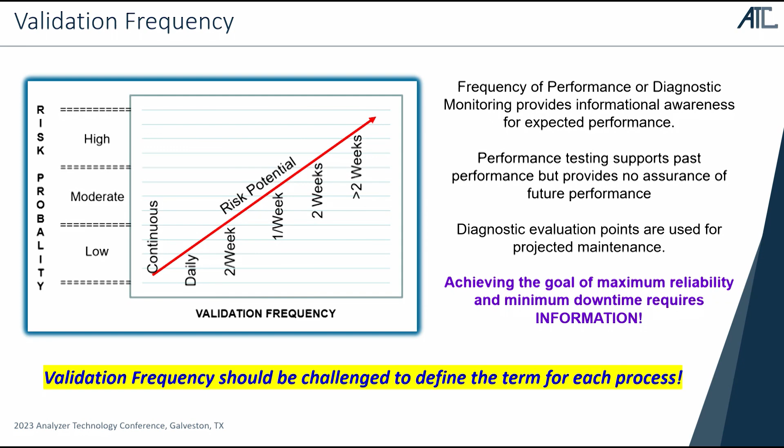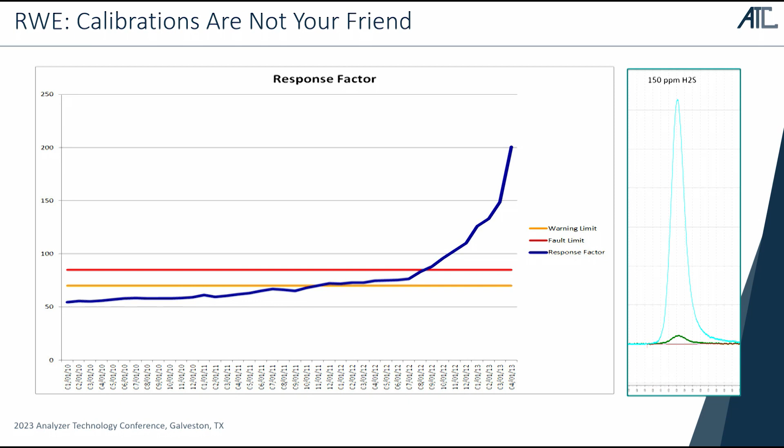At the end of the day, here's a few examples. Here's an example of where someone's maintenance strategy actually calibrated out the fault. This was a detector that read 10% of the real value as it was first delivered, and they did a monthly calibration. As the change happened in the technology, they calibrated to that change, and as a result they lost the ability to do any kind of diagnostic information on it. They really had a 7 to 8 month window.

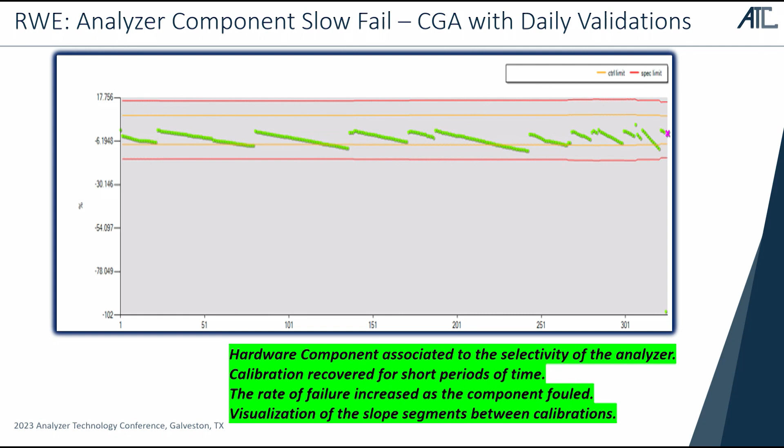Here's another example of a slow fail where they're doing calibrations. Each one of these little calibrations you're seeing, those little segments, become very significant. If you look at the slope of the segments between the first and the last, what you can see is as that slope changes, the frequency of the fail happens.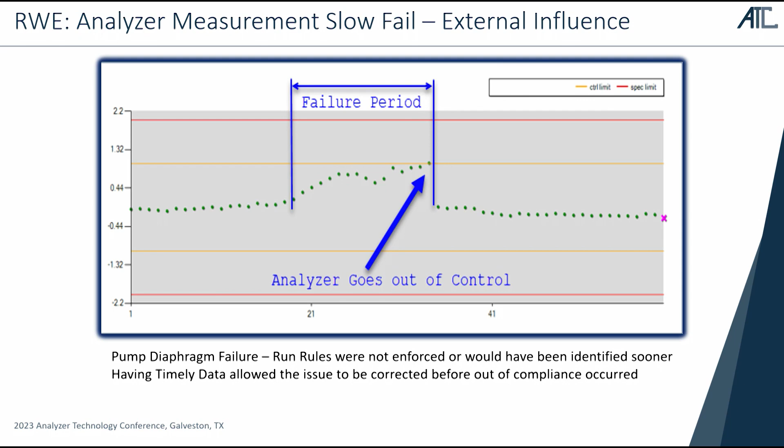Here's an analyzer that goes out of control—a slow fail with an external influence. This was actually a diaphragm pump that had a hole in it, and it affected that system. But the benefit here is look where they caught it. They had a 2-week failure period here, but they caught it before it went out, so operations never really got a bad number. They always had a number that was in control.

Here you can have run rule violations, easy to see. So what does that translate to in operations? It translates into confidence.

What does that translate into for your company? Production increase, margin, all of the above. It's good things. And when you put this kind of information in front of your management and say, hey, I need some money, the probability that they're going to agree with you is fairly significant.

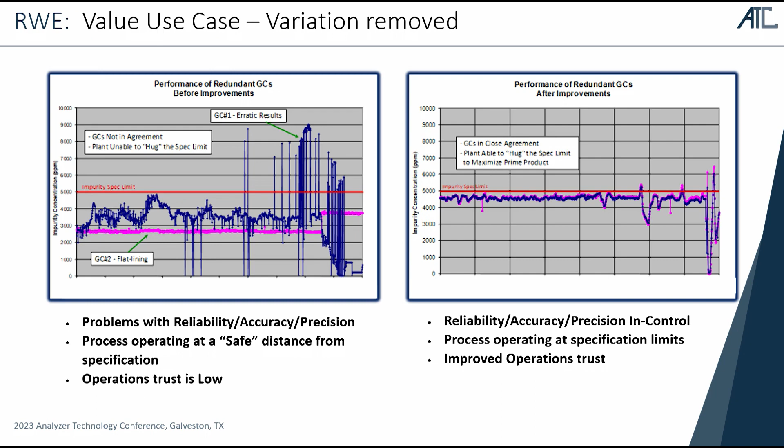This doesn't happen everywhere, but it's absolutely an excellent opportunity—when you have data available to analyze and apply that data to your maintenance situation, the reliability can go way up, the confidence in those values can go up. But in order to do that, you need a data system that collects that for you, something that looks at it for you, and you need to teach your first line resources how to look at data. That's just really huge, and it's a vicious circle.

As we look at these systems, what we're really talking about is as the reliability in analyzers goes up, the confidence goes up, the ability to run closer to production lines, to design, happens. Back in the day when we did some of this across a unit, we actually got to re-rate an operation simply because we had analyzers that could run to the control point. What does that mean? They were running within 1 to 2 parts per million of their target. That's the value that they gave them.

So this is something that you can do. What I'm really talking about is that we need data to make decisions about two things: one, your maintenance—what your maintenance schedule should be and how you should respond; and two, how you can present this information to management to maintain your funding. It's really a good thing.

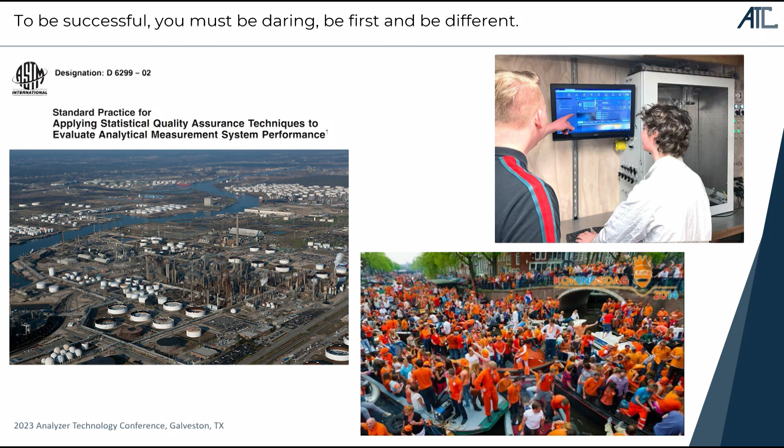I was glad that the previous speaker was explaining all the details, all the things where it is going about, in perfect detail. So I will go quickly over it because I want to go to the real challenge. But some basic definitions: we look at accuracy in terms of uncertainty, we look at precision in terms of repeatability. In practice, we have either a gas chromatograph or any other analyzer, and we expose it to an external reference, typically known as a calibration gas, but it can also be a lab sample. There are various ways to do that, and that is what we're going to teach you how to apply. That is actually the basic of the system.

So why do we validate? To determine the accuracy, to determine the reproducibility rate, and actually to provide the proof.

We go a step further. Like Michael said in the previous discussion, it's something plant specific. I slightly disagree with him - it's an ongoing thing, what you learn from the analyzer. So we go step by step.

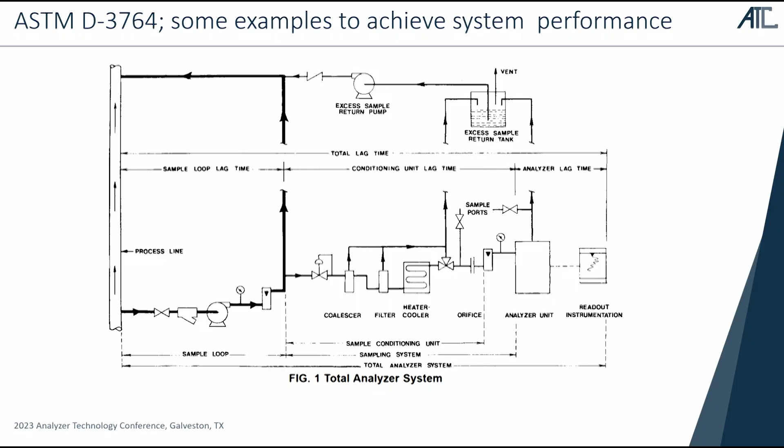What we can all see will be an easy day - there's only some checking to be done. You can go up to plant level, unit level, analyzer level, whatever you want. We try to pull more and more data from the systems.

What we try to do is, before you go out in the field, give you a glimpse of what's going on inside. So assume there's an error in the field - if you already know a direction where to look or think about, you can start processing already, in the car or on the bike like we do in the Netherlands, and start thinking about the root cause, also taking parts with you, instead of going to the analyzer, pressing buttons, and seeing what the symptoms will be. That can be very helpful - that's at least what we try to give.

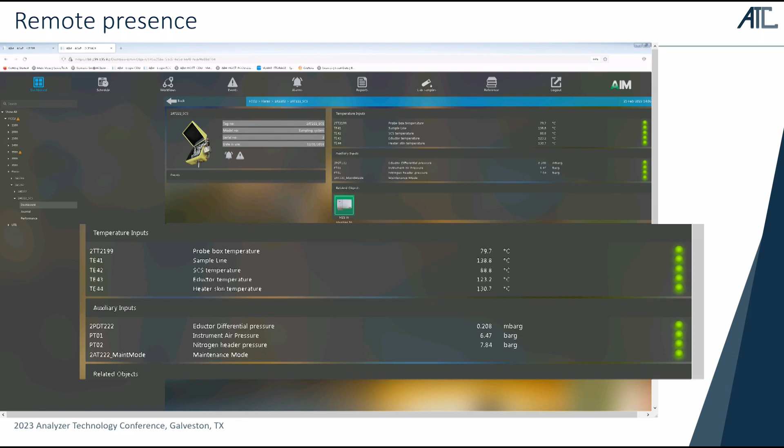Another practical example: a gas chromatograph with a liquid injection valve. According to the manufacturer of this valve or GC, every quarter the valve should be maintained, meaning replacing the seals. This end user had the feeling that maybe we can extend the interval a little bit.

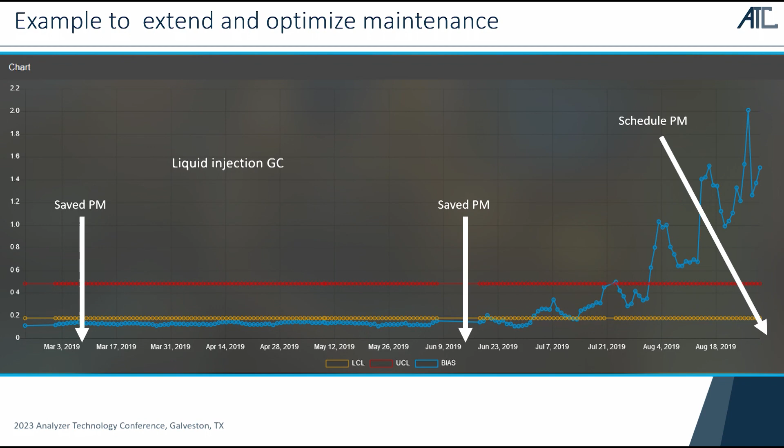You can imagine there are all kinds of things you can monitor on the system. Like Michael was saying, you can look at valves - some have 1 million cycles, so you can put a timer on it, and at around 970,000 cycles you can plan a preventive maintenance program.

Those who know me a little know LNG is my middle name - it's a sort of hobby, and we're doing a lot over there. We're building vaporizers, samplers, and using this system to monitor the whole process.

It's a batch process where a lot of money is involved. To give you an idea, the Netherlands bought a couple of cargoes last year with an average value of $300 million US. I don't know what you make per year, but for me that's a lot of money - and the amount of uncertainty also carries a lot of money associated with it.

So we clearly want to monitor the whole loading or unloading process. It starts with the validation - like Michael already explained, it's a validation and we monitor that. But we have so much more power built into the system.

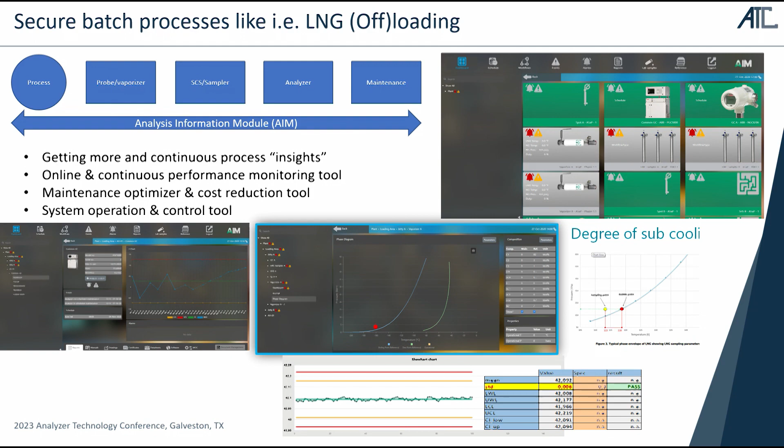Why is that so important? Because it's a very helpful tool. And this is a real example we experienced two months ago.

There was a floating facility we were starting up. That means they cooled down the whole installation. So they were making LNG on the top side, then into the big vessel they degas it, and then there was a 30-inch downcomer in a line, a horizontal part, and there was our vaporizer, and then it goes to the tank.

But this tool gave so much insight to this customer as well. So we asked, can you get a process engineer involved and pull the P&ID? And they did. And it's always funny. You make the assumption that if I have a line from the top, a horizontal line, so it must be filled. But they were cooling down.

So these huge tanks, they were spraying from the top, so there was no pressure in the pipeline. And actually, there was a lot of gasification already in the pipeline.

And it's funny by teams. If you look to the process guy and he's looking, oh, with the F word, and he knows exactly what was going on, then you know what the root cause is and you can take some steps.

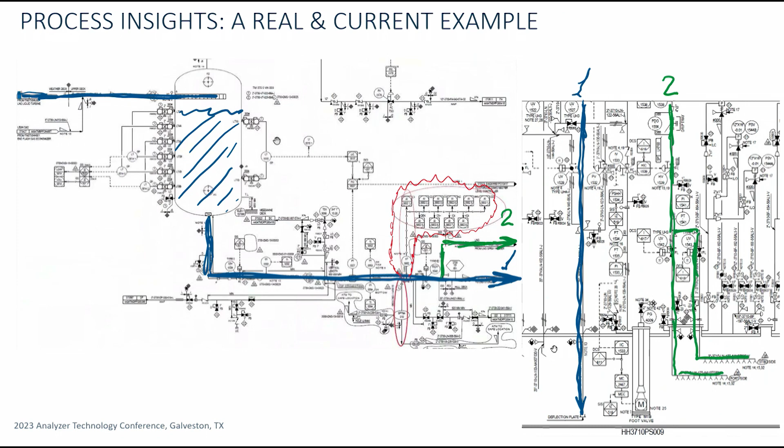So actually, in a process where you can't look into because it's heavily insulated, this gives a lot of information. In Amsterdam we do a lot of exciting things. We're drilling holes in vaporizers, we put in a cryogenic camera and we can look into it.

We can't do that in the real world. Sometimes I wish we could, but we can't. But based on data, on what we distill from our system, we can see what is going on.

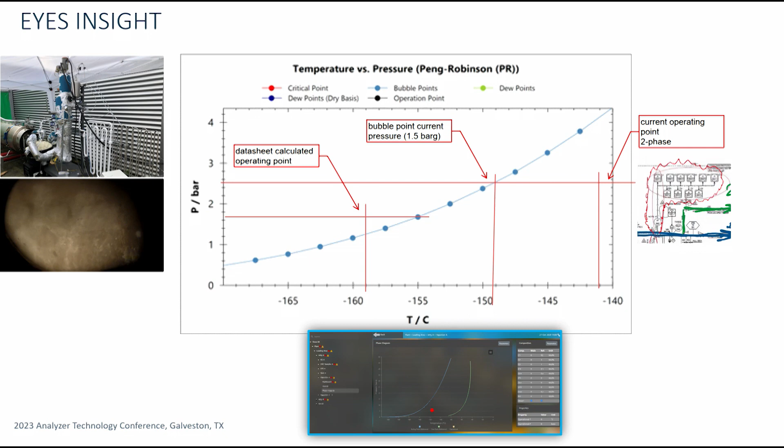So, that brings us to the next challenge. And I heard it a lot, and therefore I'm very glad that the students are also here. Like I said, we are very connected to the LNG industry.

So what we try to do with the system is create a tool for maintenance, to help focus on the things which are really necessary and skip the easy things. And therefore we need the youngsters, because their affinity with the screen is much better than the gray hairs here in the audience. So I'm challenging you.